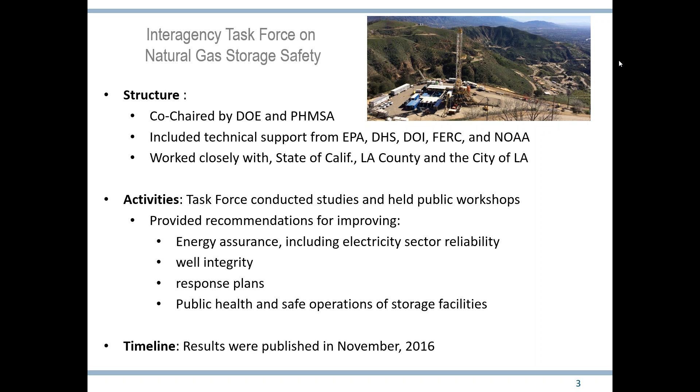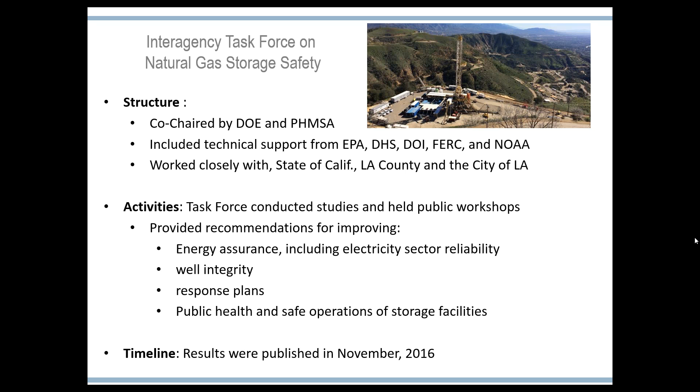So the Task Force on Natural Gas Storage Safety is co-chaired by DOE and PHMSA. That's, of course, the subject of this webinar, and their work was done with input provided by various other federal agencies, and also conducted in close collaboration with the state of California, LA County, and, of course, the city of Los Angeles as well. Task force work included several studies, research, and analysis, in addition to some public workshops that were designed to inform recommended actions and policies to help improve the electricity sector reliability, well integrity, emergency response planning, and also, of course, public health and safety of natural gas storage facilities. So the task force conducted this work over the course of about 6 months and released their final report in November of last year. So the next slide.

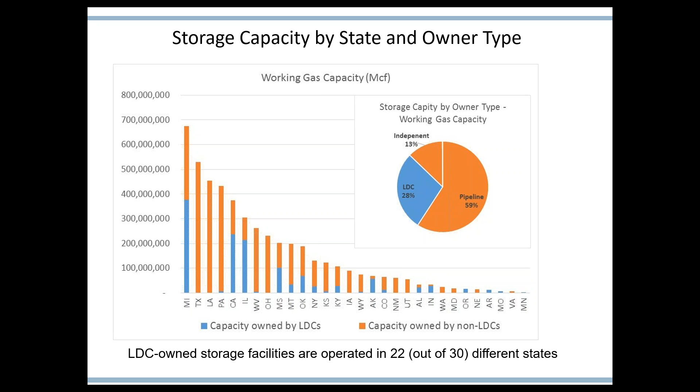So this slide just shows the location of natural gas storage working capacity by state. And it also provides a breakdown by owner type to illustrate where capacity is owned by local distribution companies, LDCs, versus non-LDCs. For the purpose of this webinar, the main purpose of this slide is really just to inform state public utility commissions and their staff where they may have natural gas storage facilities operating within their jurisdictions and subject to their oversight, which, as it turns out, accounts for almost 1/3 of total working gas capacity in the U.S. Okay, next slide.

So I'd just like to draw your attention to some related program activities at the U.S. Department of Energy through our Natural Gas Modernization Initiative. This includes ARPA-E's Monitor Program, which supports the development of low-cost methane sensing technologies for the oil and gas sectors, as well as the establishment of an independent field test site, which is actually just becoming operational as we speak, this spring, and doing some field tests over the course of this week in Colorado. The Office of Fossil Energy also has a complementary program funded with FY16 funding focused on advancing methane mitigation technologies and also methane emissions quantification efforts.

I'll also note that in 2014 and 2015, DOE worked with FERC, the Federal Energy Regulatory Commission, to develop a policy statement on cost recovery for investments in FERC jurisdictional midstream natural gas infrastructure, in particular investments to improve safety and to improve environmental performance.

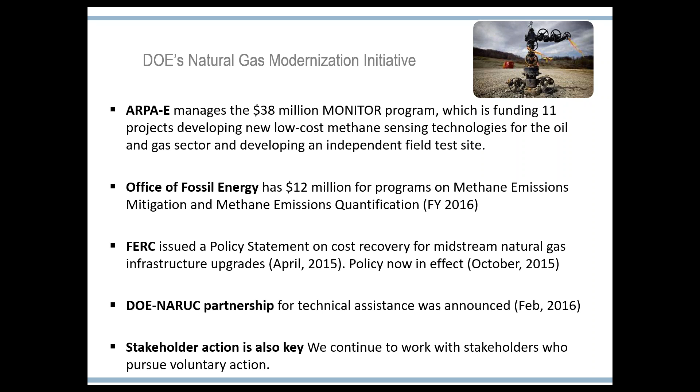And the last slide, well, I guess I'll put in a plug for the DOE NARUC partnership, which Commissioner Berman already introduced. I hope you'll stay tuned for future webinars on this topic. We'll welcome your feedback and suggestions on technical assistance that DOE could provide to NARUC and its members on the important subject of natural gas infrastructure modernization.

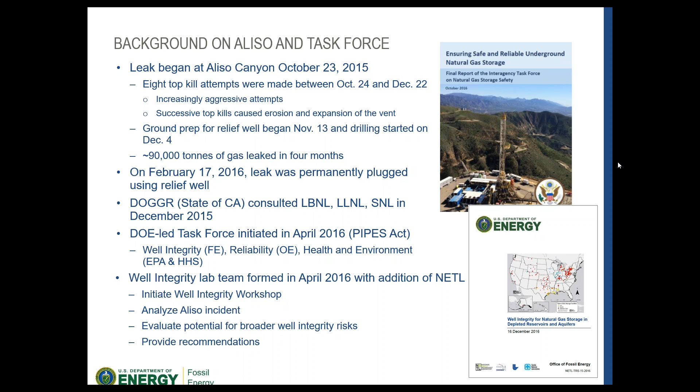And in April of 2016, as has already been mentioned, there was a task force that was initiated, and there were 3 different subgroups within that task force. The one I worked on was the wellbore integrity one, which I'm talking about now, and I think David Meyer will be speaking about the reliability work that was done. So I was at NETL. We joined with those other 3 labs to form that well integrity team to look at the Aliso incident and to evaluate an understanding of the infrastructure across the country and provide some recommendations. So next slide, please.

So this is just a schematic of the SS25 well at the Aliso Canyon field where the leak occurred. It was one of 114 gas storage wells across the field. It had a history somewhat typical of other wells in the field. It was originally an oil well drilled back in the 40s. It was converted to gas storage in 1973. It was last inspected in 79, and then they had some logs that were taken since then.

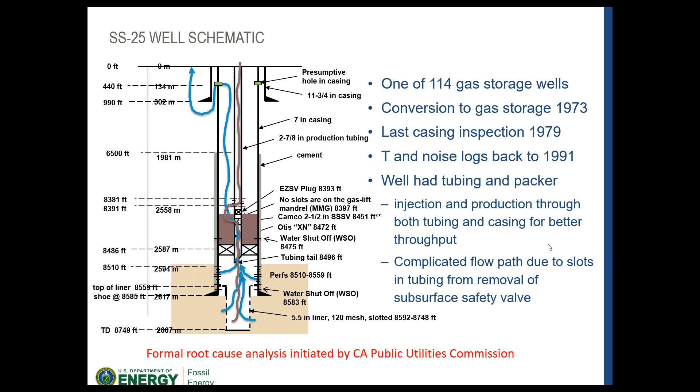They had production. It was a complicated flow path in the system because they had some tubing in the well, but they produced through all the different pieces within the system. This is a common thing in gas storage wells. They're still working on the formal root cause analysis associated with this, but part of the issue was this complicated structure downhole, and that was one of the reasons why it was so difficult to kill, to stop the leak. Next slide, please.

So the current status of Aliso is that since that one well the leak was stopped and it was shut in, SoCalGas has petitioned the regulator to reopen part of the field for injections. 41 of the 114 wells have passed all the pressure tests. There are some new operating procedures for those wells, and they've replaced all the tubing in those wells so that now there's multiple barriers for the gas to go through before it could be released. All these wells are also monitored for pressure continuously. There is daily infrared thermal imaging scanning, continuous scanning at the surface to detect any leaks that might be coming out of the ground across the site.

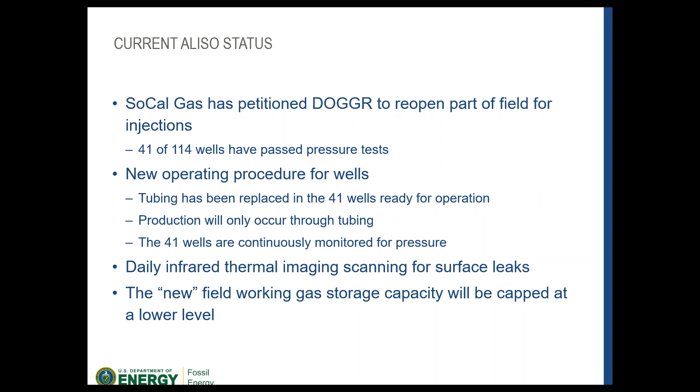And the new field working gas storage capacity is going to be capped. So originally the capacity was about 86 BCF. The new capacity is going to be significantly less than that, and we don't know exactly what that will be yet.

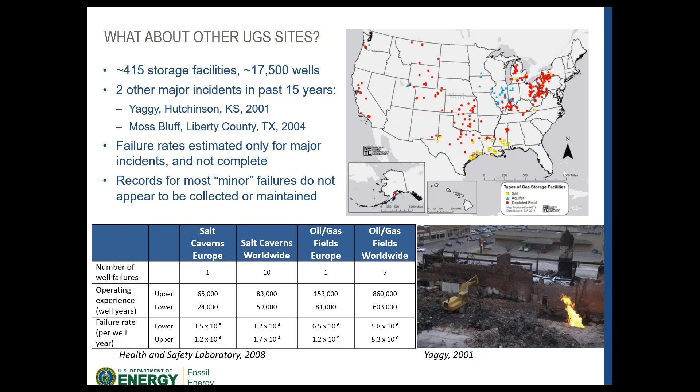There has been some work done on estimating failure incidents, but it's very incomplete. It's really only major incidents, and minor incidents are not really very well collected and categorized. But there are some numbers here from some studies that we found on the bottom left. Next slide, please.

But one thing that we found looking across the U.S. infrastructure is that this really is an aging infrastructure. 80% of the gas storage wells are in original oil and gas fields, and so a lot of those have been converted from oil and gas wells to gas storage operations, and in some cases that wasn't necessarily an easy conversion, such as what you saw at Aliso. About 15% of the wells originated before 1921, which was when cement to create a barrier to flow was put in place regularly. And 80% of the wells are more than 35 years old.

And so it's fairly common, like you saw at Aliso Canyon, to see gas produced through wells that have both the casing and the tubing in them, and it's produced through both of those, so that if the casing fails, then you get a direct leak from the well into the environment.

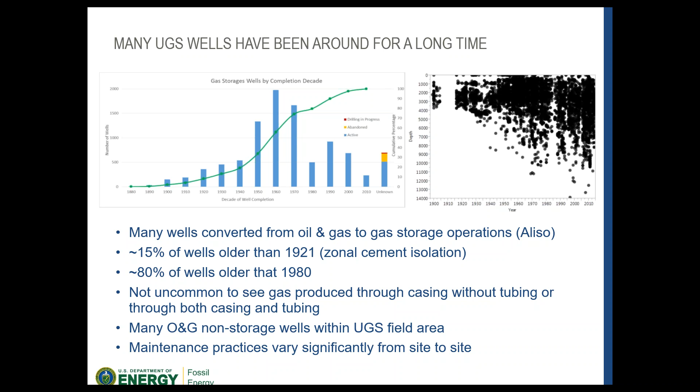But there are some who do produce through just the tubing in between, so there's multiple barriers there. It is the case that there's lots of gas storage fields that have other oil and gas wells in those storage fields because of their history. Next slide, please.

So I just wanted to briefly mention there was a well integrity workshop that this team put together back in July of last year. There's a link to it on the bottom. We had a lot of good representation across the spectrum of stakeholders, from operators to regulators to researchers and consultants. There were quite a number of opinions that were heard and were captured in the report that we put together.

We talked quite a bit about the API 1170, 1171 practices that they published and that are the basis for, well, you'll hear about those later, but there was a lot of good discussion around those. But I recommend, if you want to get some more details on what was said at that meeting, all the presentations were on that website. Next slide, please.

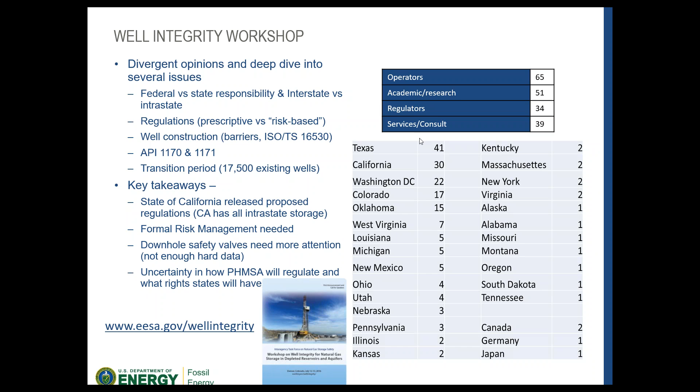So finally, I'll go to some of the recommendations that our team put together. We have three different topic areas. One is directly on wellbore integrity and what should be done to address the wells that are in the field. Our first recommendation is to phase out, everywhere that makes sense, wells with single point of failure designs, so that if there is a failure, there's a redundancy in the system so that the gas doesn't get out and cause incidents like what happened at Aliso.

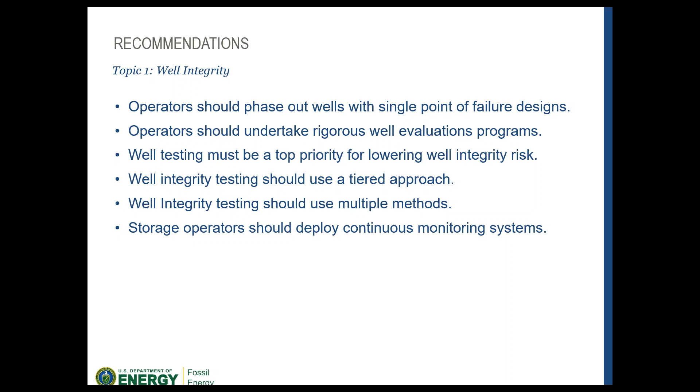And then there should be a rigorous testing program that looks at risks and uses multiple testing methods and criteria. Next slide. So our second topic is on risk management, and just the high points here. The recommendation is that you should have a comprehensive risk management plan that's reviewed periodically, and a good data collection and record storage system so that you can use that within your risk management plan to both communicate that and to update as you get more information.

And then topic 3 is on what R&D and additional data would be helpful to get a better understanding of the issues with gas storage wells. And so there are a couple of different types of tools that we recommended be tested better. So evaluate casing testing as well as downhole safety valves for their effectiveness to help you reduce the risk without causing any new ones, and to evaluate some of the other tools that might be used, both in terms of predicting how to better kill a well. And so, next slide, please.

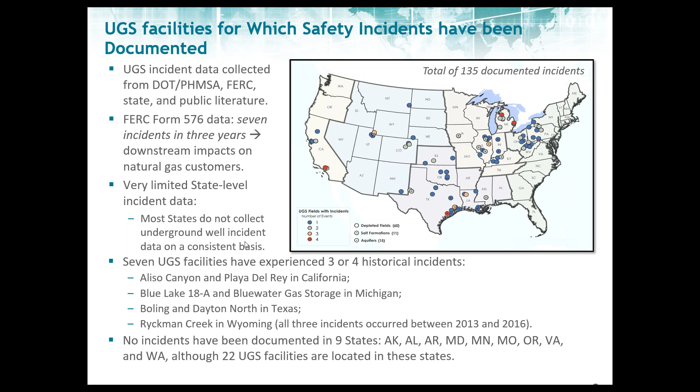Let's go to the next slide. So one of the things that Argonne did was to collect data on safety incidents at storage facilities across the country. They found a total of 135 documented incidents. In general, the state-level incident data is quite limited. That is, most states do not collect such data on a consistent basis. They found that 7 underground storage facilities have experienced several incidents over a period of years. And perhaps significantly, in 9 states, no incidents were reported, although 22 underground gas storage facilities are in those states. So let's go to the next slide, please.

The focus of Argonne's work in particular was first to identify storage facilities which, if lost, would put significant amounts of electric generation capacity at risk.

So they found that Aliso Canyon is not unique in the sense of its connections with major amounts of generation. And they found that of the 400 underground storage facilities, about 60 of them have some capacity to affect available generation capacity if they were lost. But only 12 of those 60 appear to have the potential to affect 2 gigawatts or more of existing gas-fired generation. And that 2 gigawatt threshold was suggested to us by NERC.

The working assumption is that for losses of generation less than 2 gigawatts, the generation owner or system operator should be able to deal with those losses without reliability impacts on consumers. But I want to emphasize that these numbers that I've just given you are essentially preliminary. That is, they are based on a screening tool that Argonne used.

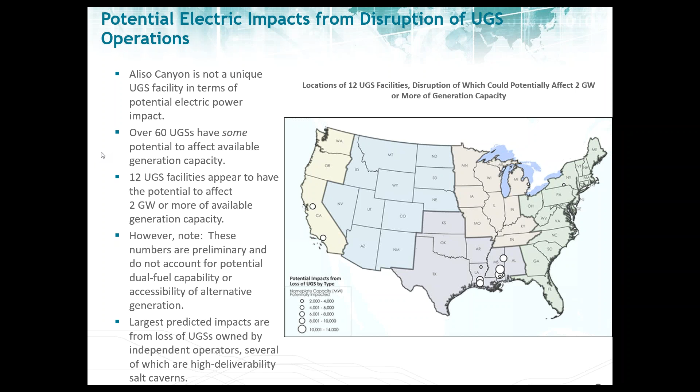The largest predicted impacts from the loss of these storage facilities is shown in the size of the bubbles in this chart on this page, particularly in Louisiana and Mississippi, where underground gas is stored in caverns and quite large facilities, and so potentially significant amounts of generation would be affected if those facilities became inoperable. Okay, let's go to the next slide.

So I mentioned work that NERC is doing. Let me give a little more detail about that. It quickly became apparent that although in Aliso Canyon the immediate focus was on the 400 other gas storage facilities, it was a wake-up call that says we need to look at all of the possible sources of disruption associated with the gas delivery system. And so NERC undertook an analysis in which they would look at pipelines, compressor stations, LNG terminals, and any other major facilities that could put deliverability of gas at risk, particularly with respect to generation.

This NERC study will look, as I said, at the 12 storage facilities flagged earlier, but it's also going to look more broadly. And Argonne is helping again, screening these different kinds of facilities. But that's only the beginning, because once a smaller subset of facilities is identified that's of particular interest, then NERC will go ahead with the more granular analysis of the circumstances at those particular locations.

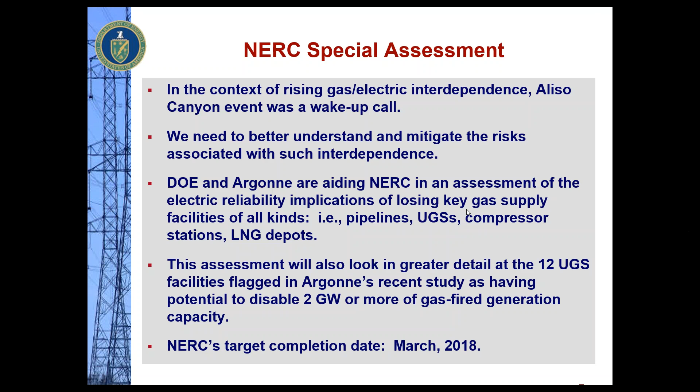Thank you so much. Now we'll turn it over to Alan Mayberry, Associate Administrator for Pipeline Safety with PHMSA. Thank you, Alan. Okay, thank you, Diane. And just to confirm, you can hear me, right? Yes, we can hear you. Okay, great. I wasn't so sure there. Again, I'm Alan Mayberry, and thank you, Diane.

It's a pleasure to be here to talk to you about underground storage and where we are with implementing a rule that we recently reissued. And I'm joined today by Byron Coy, our Senior Technical Advisor. He's leading the effort at PHMSA with implementation of our underground storage oversight program. And then also Zach Barrett, who's our Director of State Programs, who is focusing on the state side as far as implementation of this new program for us.

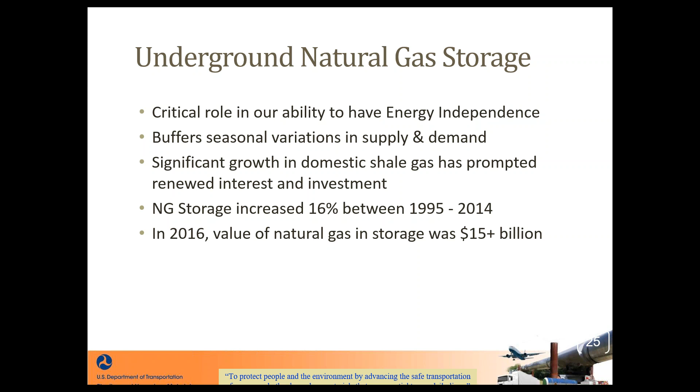It's hard to imagine that only a few years ago we were looking at importing natural gas, and here we are with such an abundant supply. And of course, there you can see the value of the natural gas in storage. And moving on to the next.

Just as far as the universe out there, we're dealing with about 124 companies or operators, about 4,800 BCF working capacity. About half of the 400 plus fields out there are considered intrastate operators, and the other 50% or 200 are interstate. And then these are their facilities in 31 states, of course, 17,000 wells, and on average about 41 wells per facility. Next slide.

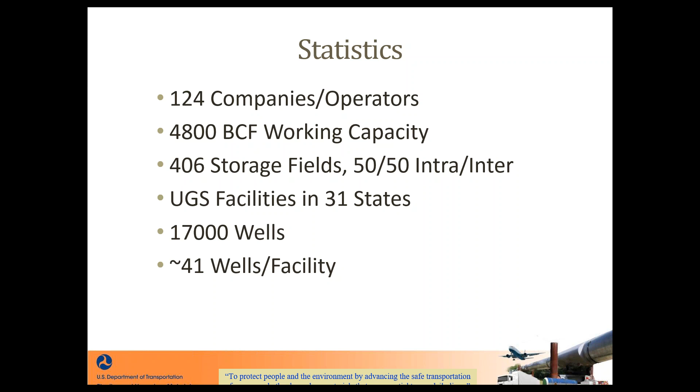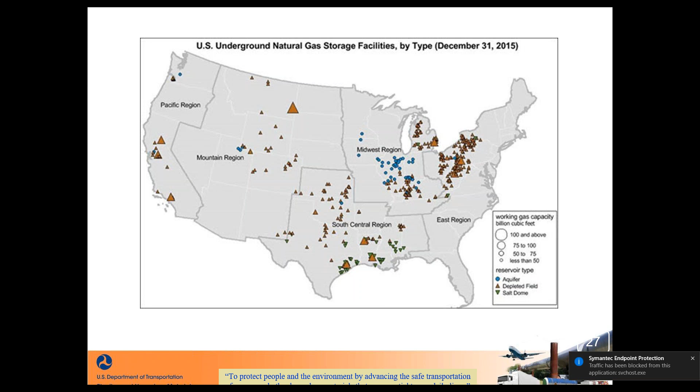As you may know, when we were reauthorized last year in the PIPES Act of 2016, we were directed by Congress to establish regulations for underground storage. We've always had the authority to cover this area since the Natural Gas Pipeline Safety Act of 1968, but over the years and various efforts, we had not extended our regulations downhole into storage facilities. The coverage of our regulations really stopped at the manifold or the Christmas tree in the storage facility, and it would cover piping in the facility, but wouldn't go downhole.

But in 2016, we were directed to do so, and then later in 2016, in December, we issued the interim final rule, which is a tool we use when we want to get a final rule out quickly. It's followed by a comment period, but that's the quickest way we have to get out and regulate, in this case, a space that we weren't currently regulating.

Now, I'll turn it over to Byron here in a second, but currently we're working on developing inspection criteria and also our training curriculum at Oklahoma City, where our main training facility is located. And then we're looking to start new inspections in this area in the first quarter of 2018. So with that, I'll turn it over to Byron, and then he'll be followed by Zach. So take it away, Byron. All right, the next slide there.

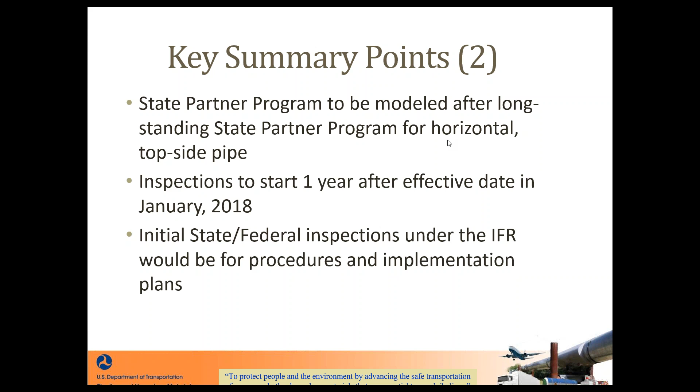The other point that we want to make is that this program, the underground storage program, has been closely coordinated with our executive management. We've kept them informed all along the way of our efforts here and what needs to be done and where we're at. A really key point, I think, for folks to hear, and we've said this from day one, is that the minimum federal regulations, the IFR, does not impact any permitting or certificates that are currently in place. The fact that PHMSA has issued rules does not prohibit any permitting that a state program has authority to do in any shape, form, or fashion. So I just want to be sure that we're clear about that.

We think it'll be about 3 to 8 years for the operators of the underground storage facilities to conduct a baseline well assessment to assess their tubulars and the facilities and take preventive and mitigative measures to address any issues that the assessments might bring forward. And we're working on some additional FAQs to allow for operators who have done prior assessments. In other words, if they've recently done prior activities to analyze the integrity of the well, we want them to be able to take credit for those and not just have to do those again. So we're looking at that currently now.